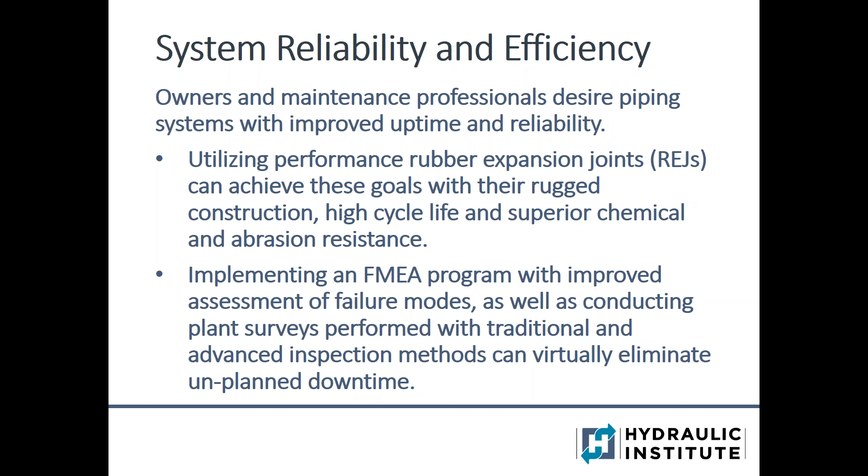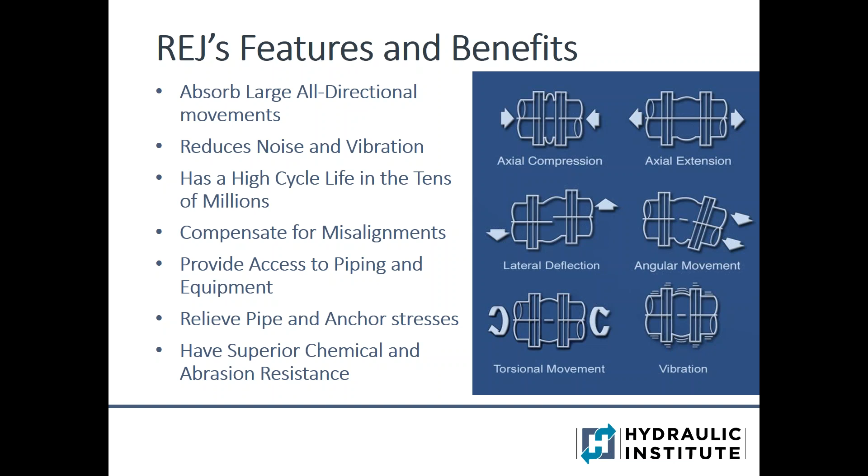Here the rubber expansion joint moves axially, laterally, angularly, and torsionally, all within a compact body.

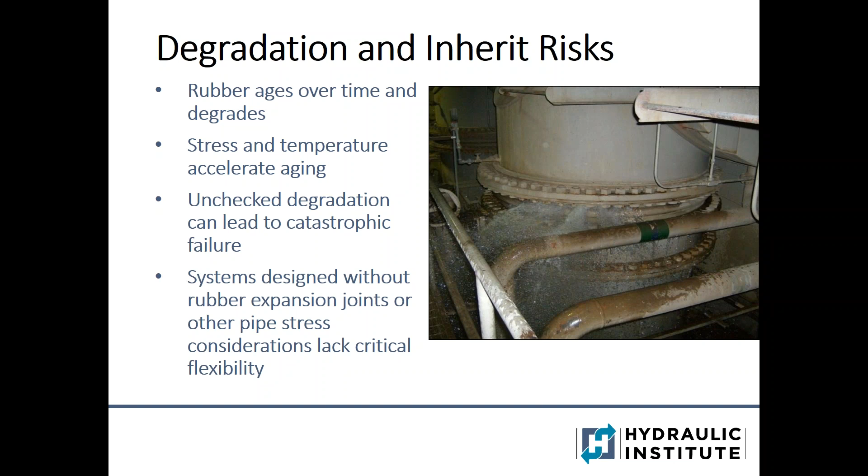Degradation and inherent risk. Rubber ages over time and degrades. Stress and temperature accelerate aging. Unchecked degradation can lead to catastrophic failure, but it is also important to recognize that systems designed without rubber expansion joints or other pipe stress considerations lack critical flexibility and can have catastrophic consequences itself. This is another highly misunderstood aspect of rubber expansion joints.

While this is a review, there are aspects to the performance rubber expansion joint that directly improve efficiency and reliability, and worth re-mentioning in this section.

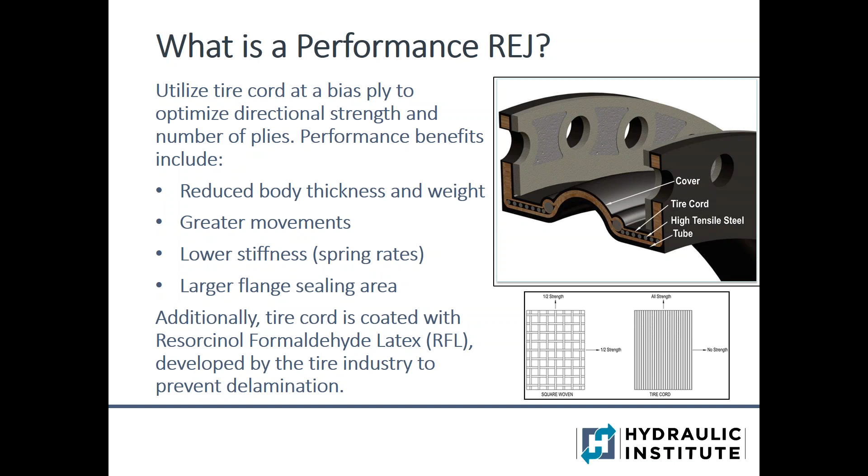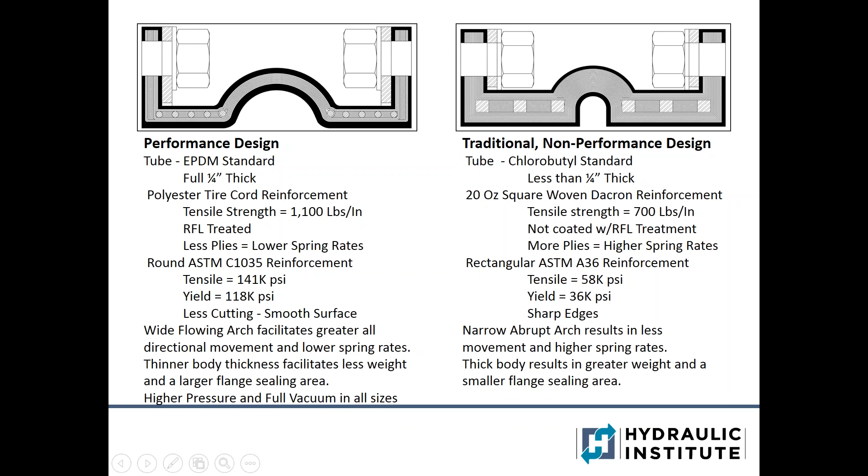The smaller flange sealing area you can see from underneath the bolt hole of the non-performance joint is very small, and we have a photo of a rusty leaking flange as a result of this in the upcoming slides. So the non-performance design have higher internal stresses that accelerate the effects of aging.

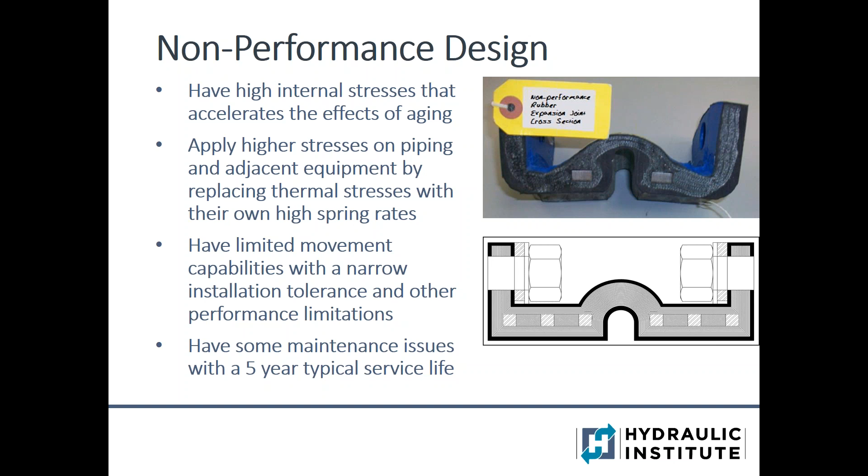They apply higher stresses to the piping and adjacent equipment by replacing thermal stresses with their own high spring rate. They have limited movement capability with a narrow installation tolerance and other performance limitations, have some maintenance issues with a 5-year typical service life. The performance design has low internal stresses that minimize the effects of aging.

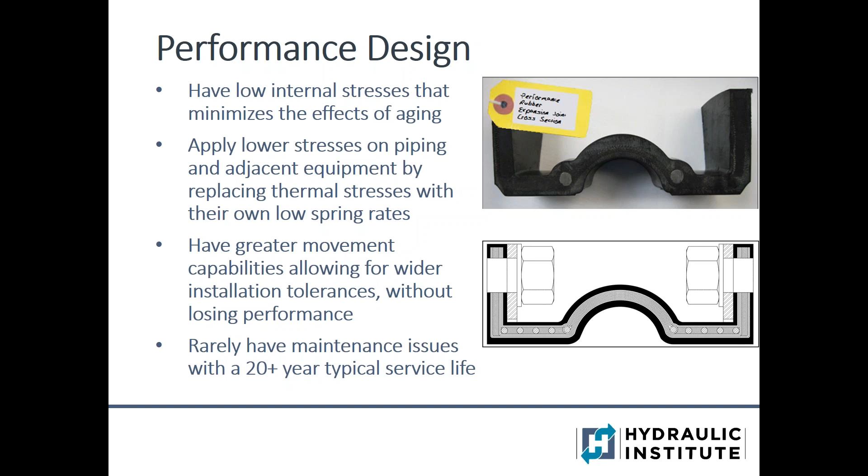They apply lower stress to piping and adjacent equipment by replacing thermal stresses with their own low spring rates, have greater movement capability, allowing for wider installation tolerances without losing performance. They rarely have maintenance issues with a 20+ year service life.

Custom performance designs can be built to custom field dimensions, reducing installation time and cost, as well as increasing service life. This maintains 100% performance capability of the rubber expansion joint, and applications include accommodating for large ground settlement or pipe and equipment modification. We have already talked about different rubber expansion joint styles, including single and multiple arch, reducers, lightweight, high pressure, and high temperature types that all play a part in custom performance replacement expansion joints as well.

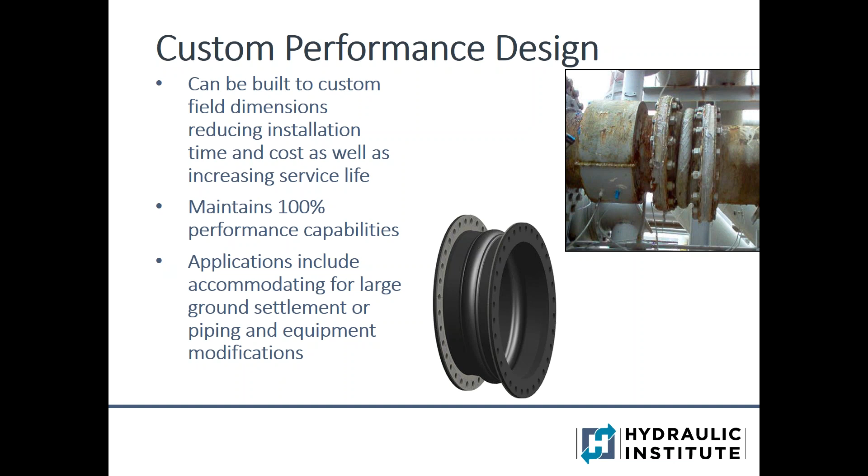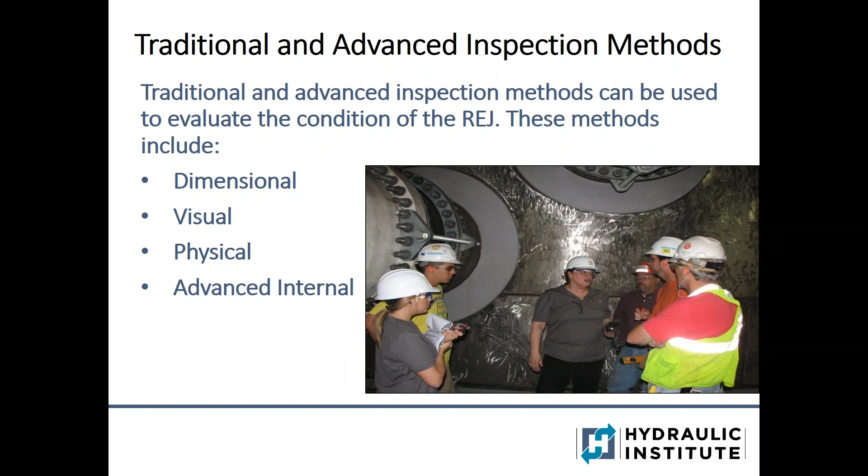Traditional and advanced inspection methods can be used to evaluate the condition of rubber expansion joints. These methods include dimensional, visual, physical, and advanced internal.

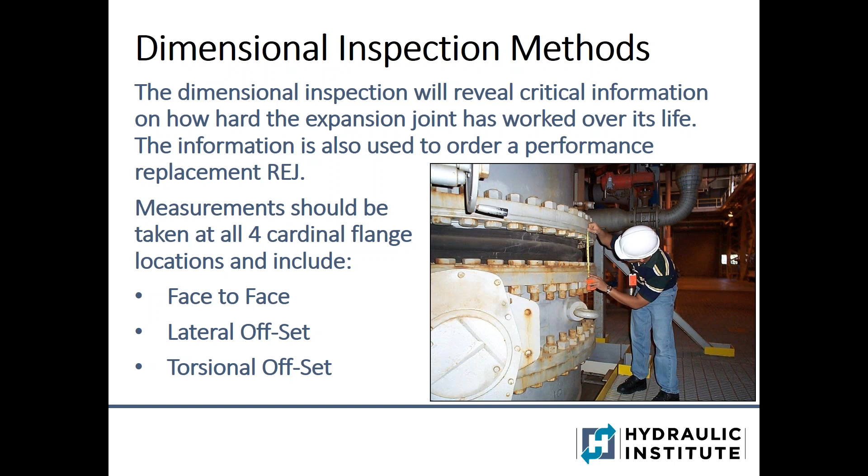The dimensional inspection will reveal critical information on how hard the expansion joint worked over its life. The information is also used to order a performance replacement rubber expansion joint. Measurements should be taken at all 4 cardinal flange locations and include face-to-face, lateral offset, and torsional offset.

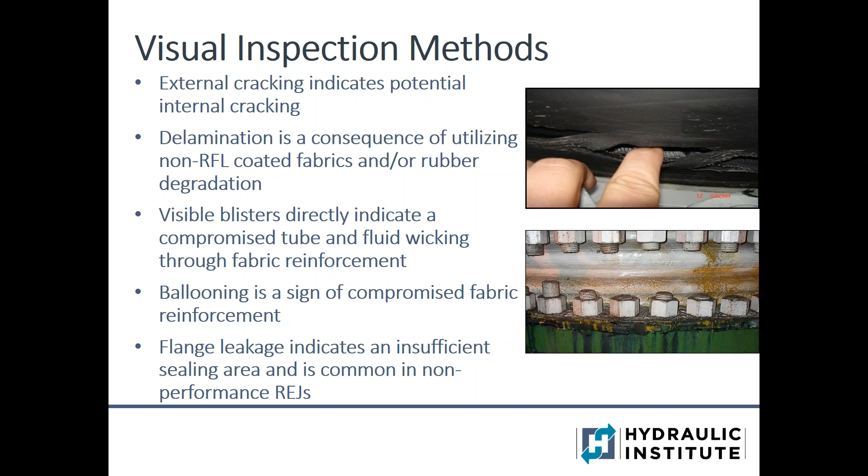Some see this as a consequence of an aging expansion joint, but it really should not be. It shouldn't leak for its entire life expectancy.

Physical inspections include durometer readings. They reveal critical information on the general rubber expansion joint age and condition. Aged rubber is generally harder and more brittle to the touch, often displaying cracking. ASTM D2240 Shore A durometer is recommended for this inspection method.

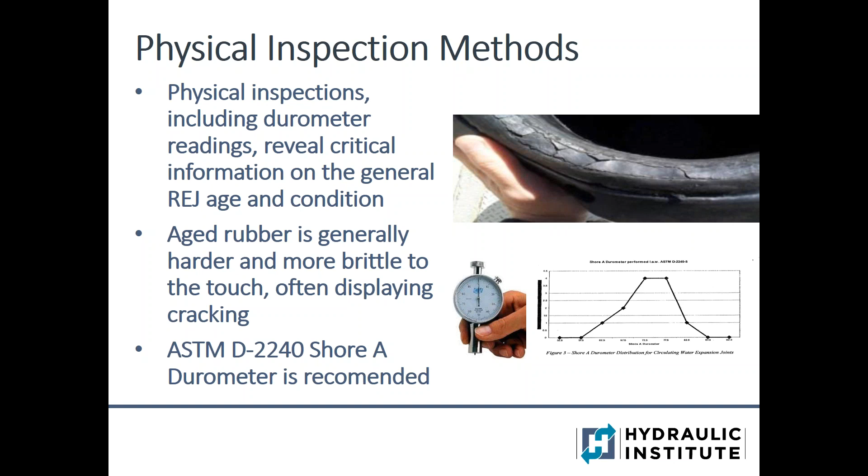As a lead-in to the advanced internal inspection methods, it is appropriate to mention and reference EPRI's work in this area, including their study on improving the management of rubber expansion joints.

EPRI created a technical advisory group with specific goals. TAG contributors included utility sponsors, EPRI representatives, academic researchers, representatives from the rubber expansion joint manufacturers, and inspection vendors.

Goals included helping the industry better manage the rubber expansion joints to avoid failure, identify common failure modes and environments that are more susceptible to failure and degradation, develop a proactive approach for rubber expansion joint management, inspect rubber expansion joints for degradation prior to failure, and identify the primary techniques to inspect for the failure mechanisms of concern.

Advanced internal inspection methods: to help put this in perspective, traditional inspection methods provide a sound ability to detect problems related to external degradation and can be an indicator of internal degradation. Significant ambiguity, however, remains in evaluating the actual internal degradation.

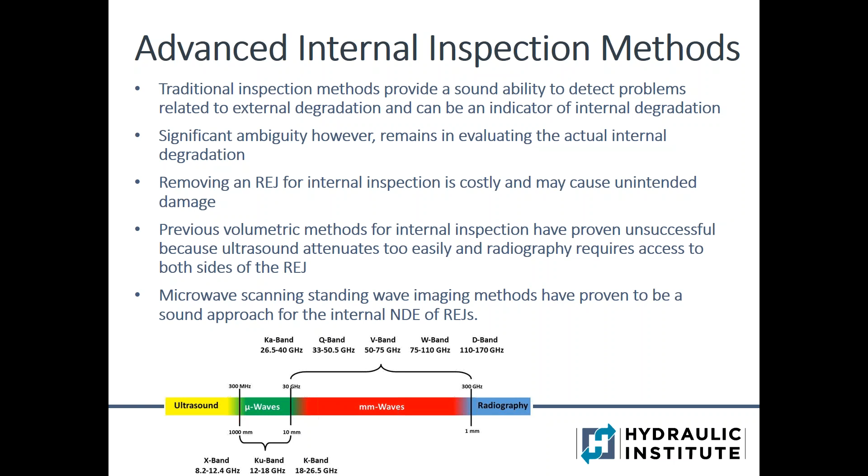Microwave scanning standing wave imaging method has proven to be a sound approach for the internal non-destructive evaluation of rubber expansion joints.

So more about the microwave scanning standing wave imaging method. We all recognize a standing wave with its classic sinusoidal shape. Well, a single detector has regions of low intrinsic sensitivity. With a dual detector, areas of low sensitivity on one detector correspond to an area of high sensitivity on the second, ensuring a defect of interest will be detected.

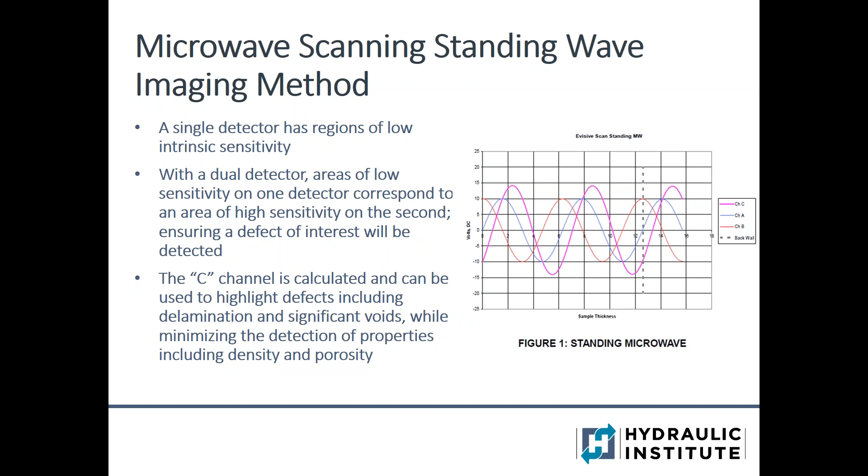A C-channel is calculated and can be used to highlight defects including delamination and significant voids, while minimizing the detection of properties including density and porosity.

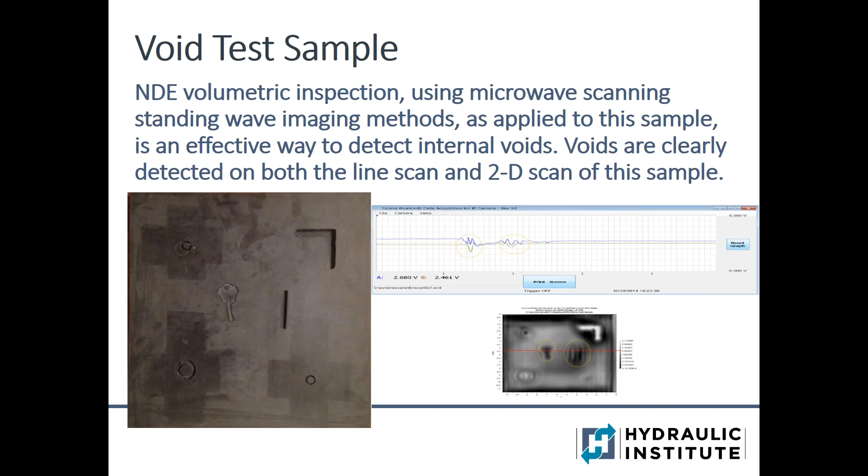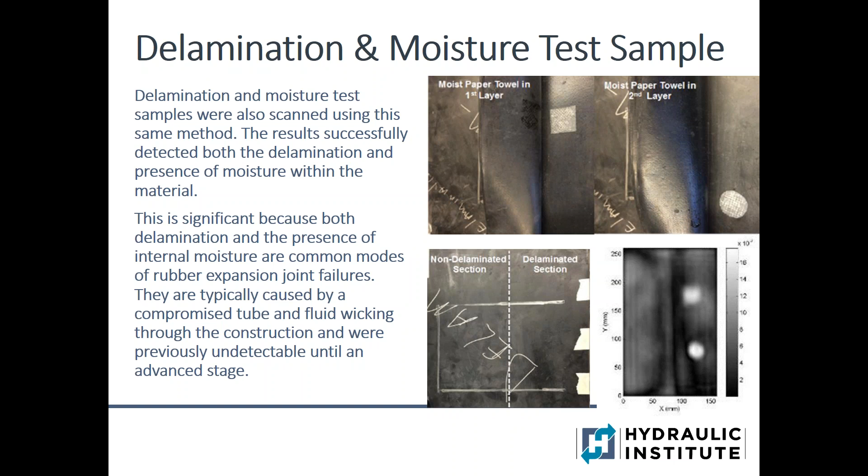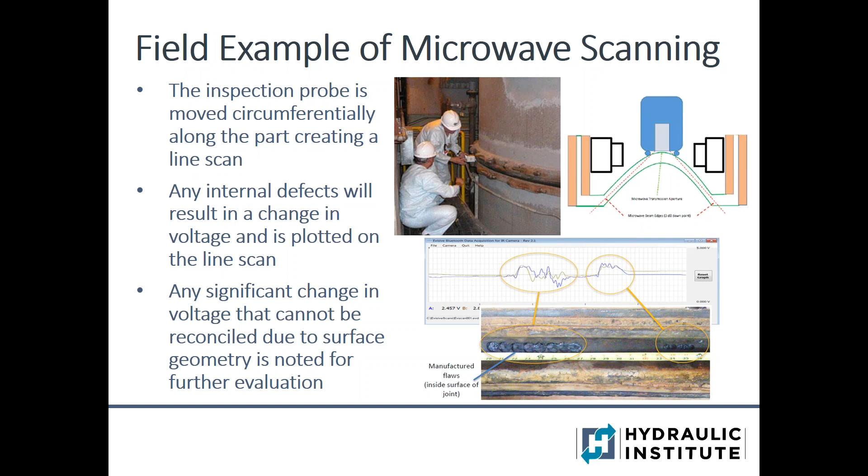Field example of microwave scanning. The inspection probe is moved circumferentially along the part, creating a line scan. Any internal defect will result in a change in voltage and is plotted on the line scan. Any significant change in voltage that cannot be reconciled due to surface geometry is noted for further evaluation.

So EPRI's report had some limitations or shortcomings, and we put together some supplemental information. The results of the report showed significant promise in the detection of degradation in rubber expansion joints and some potential to detect changes in material properties.

A great deal of the report focused on the goal to identify and develop non-destructive evaluation inspection techniques relating to degradation in rubber expansion joints prior to failure. The report was less conclusive relating to the detection of aging effects on rubber expansion joints as well as some of the other TAG goals.

We took the initiative to address some of the less conclusive findings by providing supplemental information on industry best practice as presented here, including utilizing performance rubber expansion joints as well as traditional and advanced inspection methods.

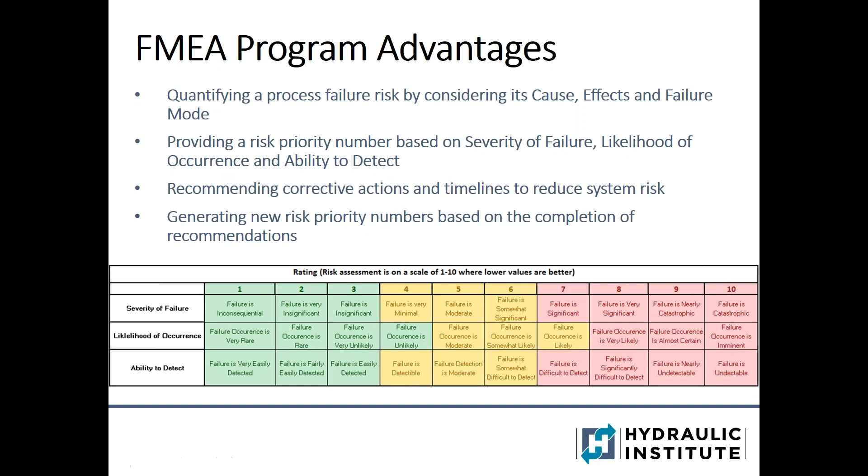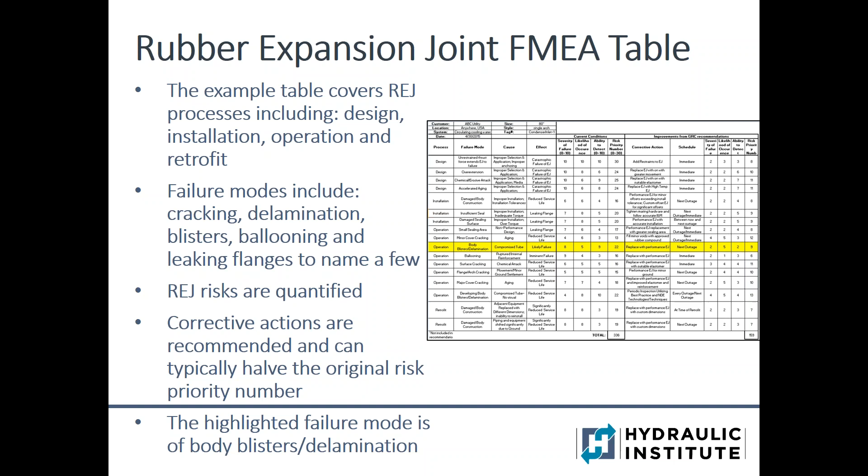The highlighted failure mode is of body blisters and delamination. So when we take a closer look at this failure mode, the process is maintenance, repair, and operation. The failure mode, again, is body blister delamination.

Cause is a compromised tube. The effect is likely failure. Severity of failure is high. Likelihood of occurrence is high, and ability to detect was low, so the number is high. This generally produces a high risk priority number.

Corrective action included replace with performance rubber expansion joint, which minimizes both the severity of failure and likelihood of occurrence, and utilize traditional advanced inspection methods to improve the ability to detect. Schedule at the next outage, and the severity of failure, likelihood to occur, and the detectability all drop down low to a very low risk priority number.

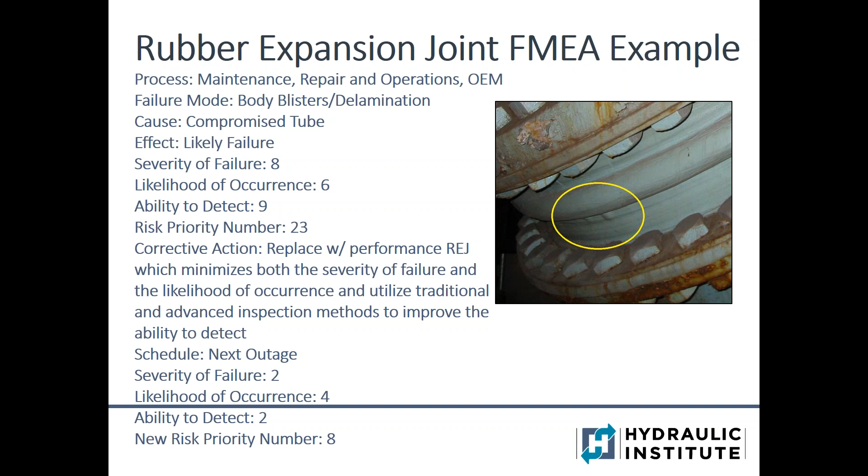So reliability and efficiency, some conclusions include: combining performance rubber expansion joints with traditional and advanced inspection methods can significantly decrease the inherent risk of systems that utilize them. A traditional FMEA program will quantify the reduction in system risk resulting from minimizing the severity of a rubber expansion joint failure and the likelihood of its occurrence, as well as improving the ability to detect rubber expansion joint failures. This permits a transition to a condition-based maintenance program, departing from the previous calendar-based or run-to-failure practice. Additionally, and possibly more important, this can virtually eliminate unplanned plant downtime.

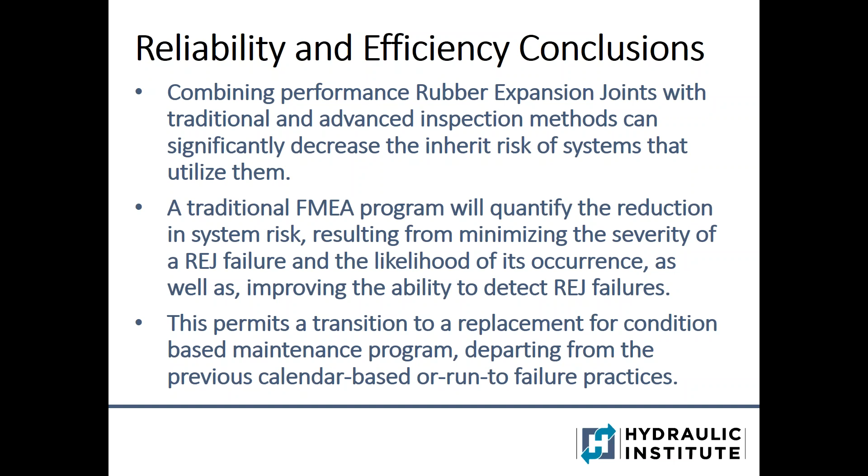To round out our presentation, it is appropriate to discuss some manufacturers' qualifications. It is good practice that the manufacturer be ISO 9001, 14001 certified. Manufacturers should be an active member of the Fluid Sealing Association, and the Expansion Joint Piping Technical Handbook is newly revised and filled with industry best practices and performance arrangements. Manufacturers should also be an active associate member of the Hydraulic Institute, contributing to important standards and educational material.

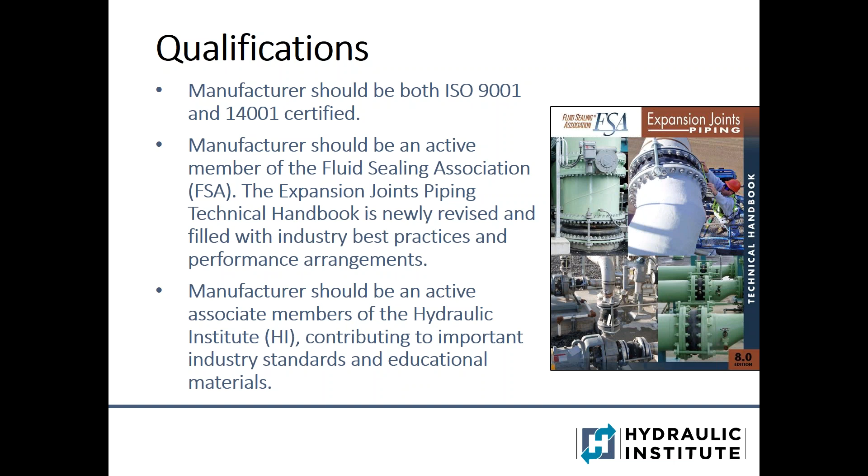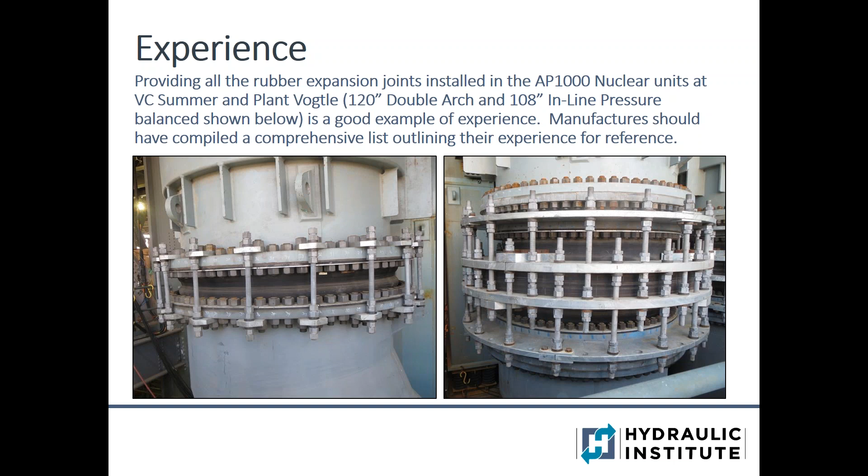Experience: providing all the rubber expansion joints installed in the AP1000 nuclear units at VC Summer and Plant Vogtle, that's 120-inch double arch and 108-inch inline pressure balanced shown below, is a good example of experience. Manufacturers should have a comprehensive list outlining their experience for reference.

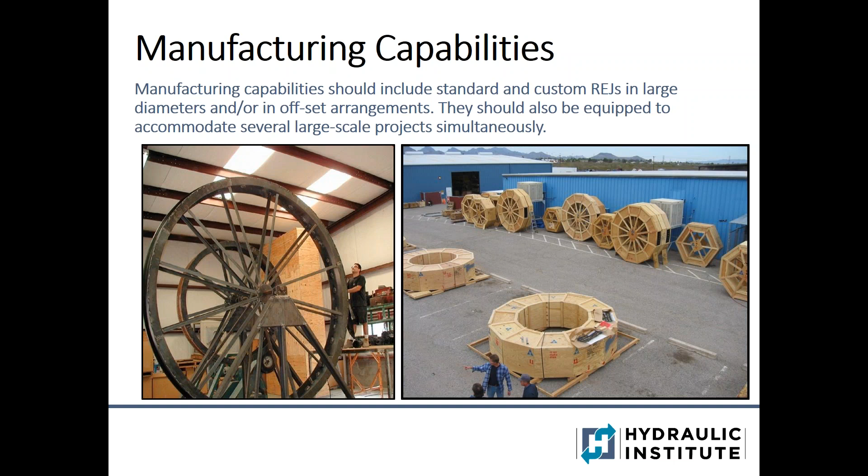Manufacturing capabilities should include standard and custom rubber expansion joints in large diameters and/or offset arrangements. They should also be equipped to accommodate several large-scale projects simultaneously. Testing capabilities should include automated and manual hydro and vacuum testing for all sizes and arrangements. Burst testing and third-party witnessing should also be available.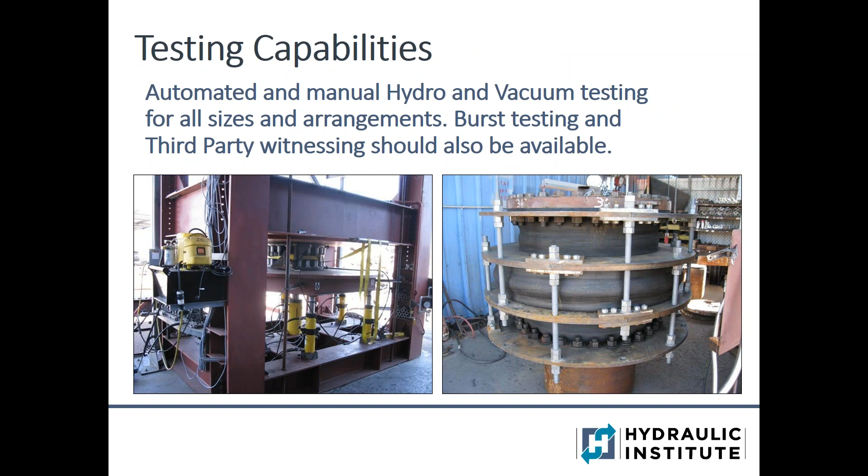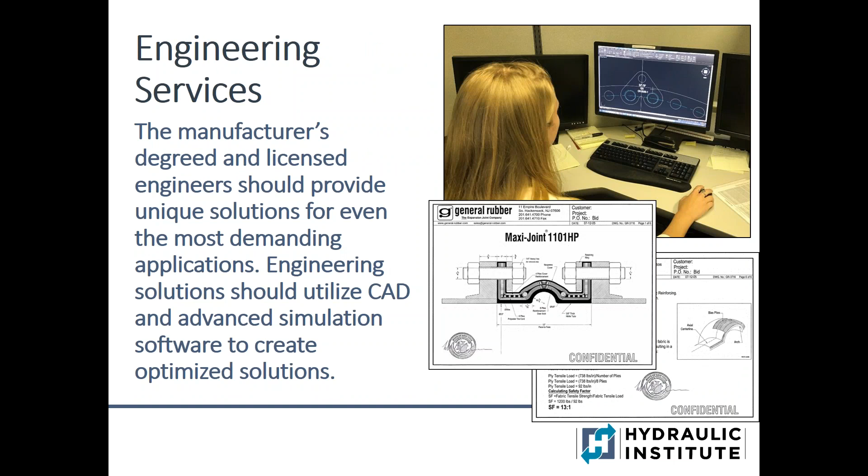The manufacturer's degreed and licensed engineers should provide unique solutions for even the most demanding applications. Engineering solutions should utilize CAD and advanced simulation software to create optimized solutions. Manufacturers should provide on-site plant surveys and inspections, as well as troubleshooting, training, and expedited replacements when needed.

Unique services should be provided, including a best piping practice and optimization program for system optimization with reduced footprint and energy consumption, to minimize loads on piping equipment and support structures, to reduce material and construction cost, for direct engineering support with full comprehension of pipe codes and standards for seamless integration, and to utilize performance rubber expansion joints with advanced restrained and unrestrained designs.

Unique services should also include a plant reliability and efficiency program for a transition to a condition-based predictive maintenance program, an FMEA approach with improved assessment of failure modes, for industry best practices, direct training and technical support, and for plant surveys performed with traditional and advanced inspection methods, and to utilize performance replacement rubber expansion joints.

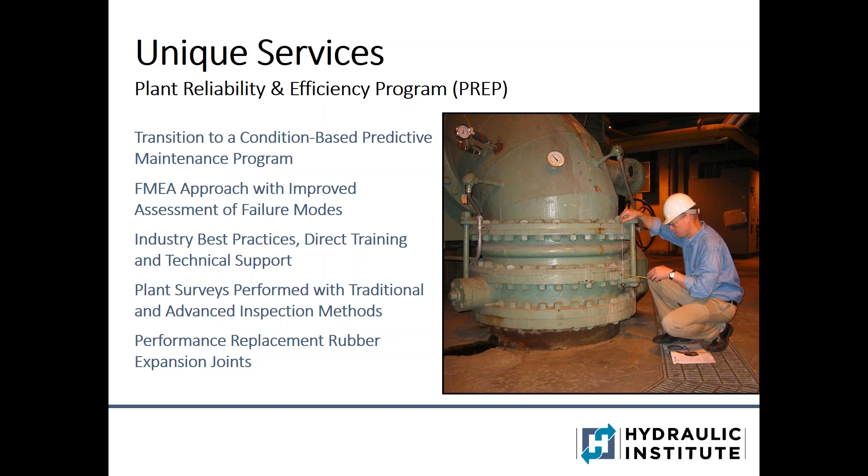Industries and sectors served should include power, both fossil and nuclear, chemical processing, wastewater, mining and mineral processing, pulp and paper processing, steel production, marine, and heating, ventilating, and air conditioning.

From the world's largest common cooling water system, Ras Laffan, Qatar, to multiple AP1000 nuclear plants such as at VC Summer and Vogtle, the manufacturer should collaborate with leading EPC firms and understand the demands of large international new construction projects. Unique services, including best piping practice and optimization programs, is the best way to support this important market segment.

The manufacturer should also have installed capacities across multiple industries and sectors dating back decades, and experience in developing MRO solutions. Specifically, this should include providing performance replacement expansion joints and educating the customer to ensure the continued efficiency, safety, and reliability of their plants.

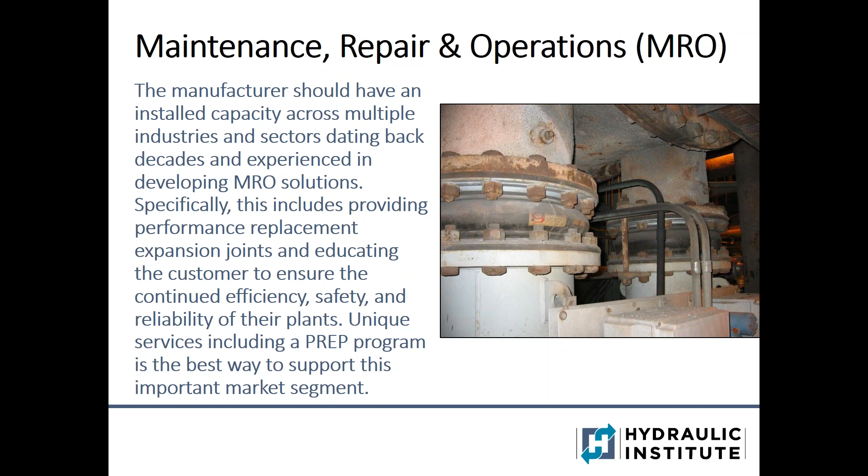Unique services, including a plant reliability and efficiency program, is the best way to support this important market segment.

Manufacturers should be dedicated to providing technical sales and support to original equipment manufacturers across all essential equipment types and around the world. Unique services, including an OEM solutions program, is the best way to support this important market segment.

Regarding resources, manufacturers should find it important to not only provide a performance product, but also enrich their clients with detailed application tools and educational materials to help them make the best and most informed decisions.

These resources should be easily accessible and include features and benefits, materials of construction, selection and application, catalogs, data sheets, guideline specifications, installation and maintenance instructions, case studies, application demos, solid model images, flange data, technical articles, as well as frequently asked questions, to name a few.